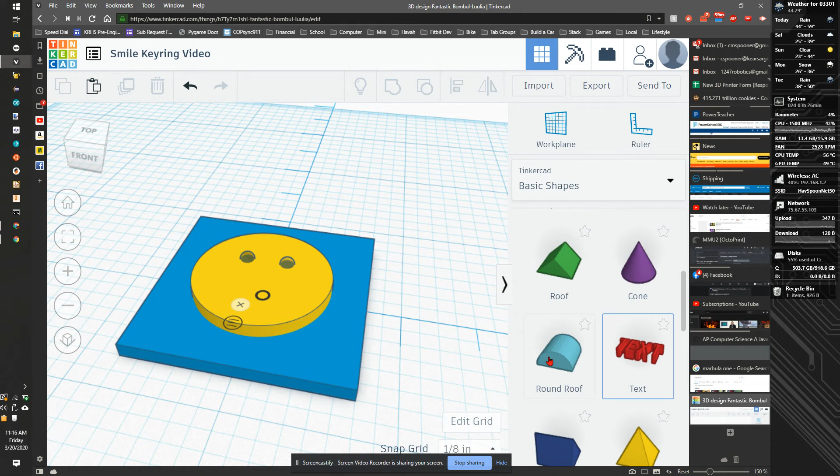So I'm gonna take and drag this piece out. Now, I like to move things out away from my shape before I start, because that lets me sort of fix them. Now, if you notice, the orientation of this piece is wrong. So the first thing we need to do is we need to take and rotate him 90 degrees upwards.

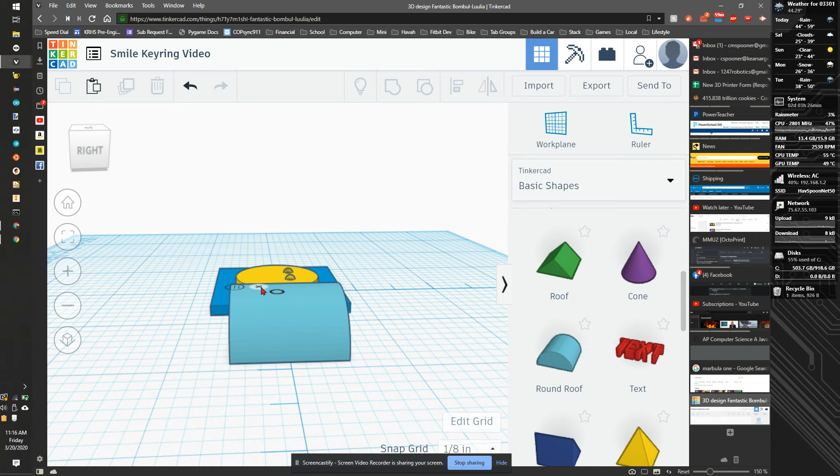So if you click on the shape, and I'm going to go to isometric view, you can see we have this angle here. This lets me rotate this on this axis. This lets me rotate this axis. And then this guy, who's hard to see, lets me rotate it on the axis we actually care about. So I'm going to click on this guy here.

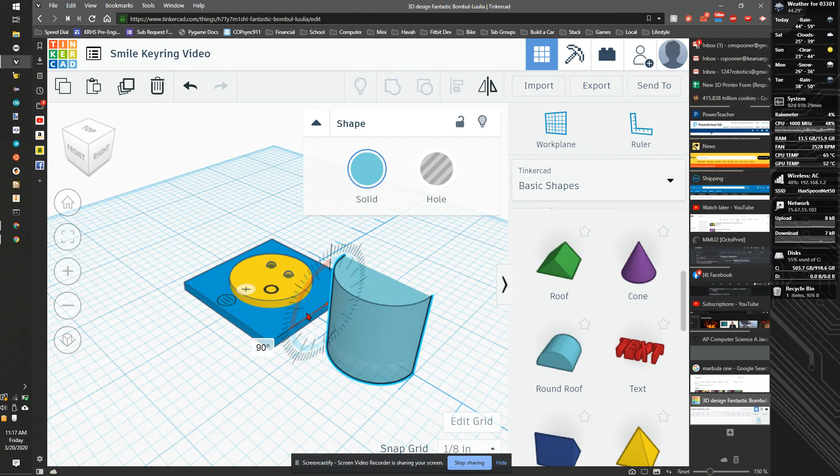And now if I move outwards, I can move it more finely. If I move it middle, it's going to move on the 5s. And if I move on the very inner, I can only move it at very specific things, like only 22.5 degrees each time, sort of like a clock. So I'm going to go to 90, and that should set me to be the right

location, right, or angle. Now, I need to scale this guy down, because if you make him the full size of the smile, he'll take up the whole bottom of the thing. I'm going to make this 0.75. That's going to change to 3/4, but that's fine.

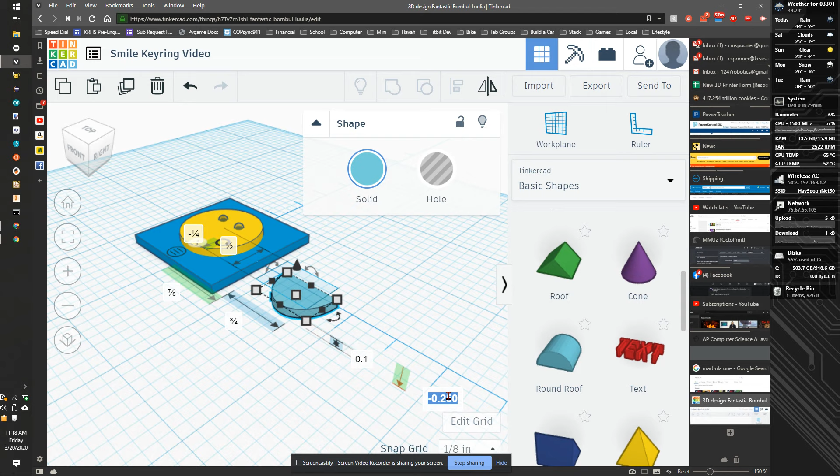I'm going to set this height to be 0.1, and then I want this thing to be up off the bed a little more than 0.1. So I'm going to go 0.125. I need this to stick out slightly from the face, otherwise it meshes weird, and I don't trust it's actually going to cut it out. If I want to cut this deeper, I can always make this taller to compensate.

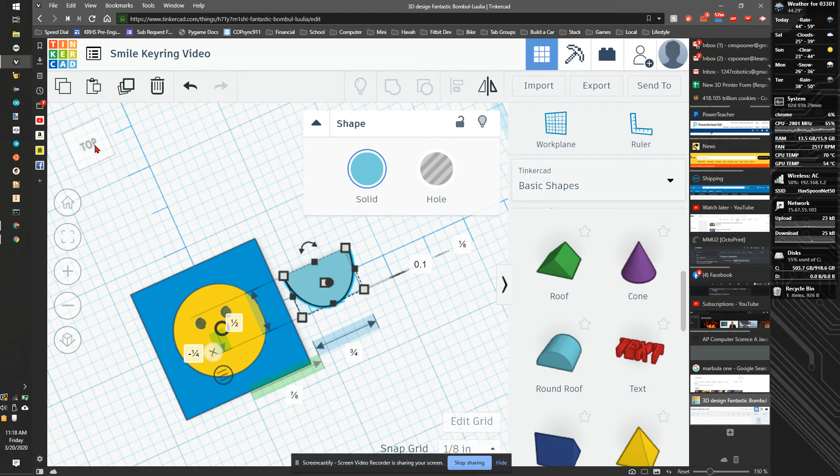Now, I'm going to look at the top, and I'm going to rotate the top so it's more like the way I want it to be, which is always dizzying. And I'm going to click the top again. There we go. I also need to change this height because it's a little tall. So I'm going to change this from a 3/4 inch to 0.25. 0.25. Maybe I should make this smaller. 0.5.

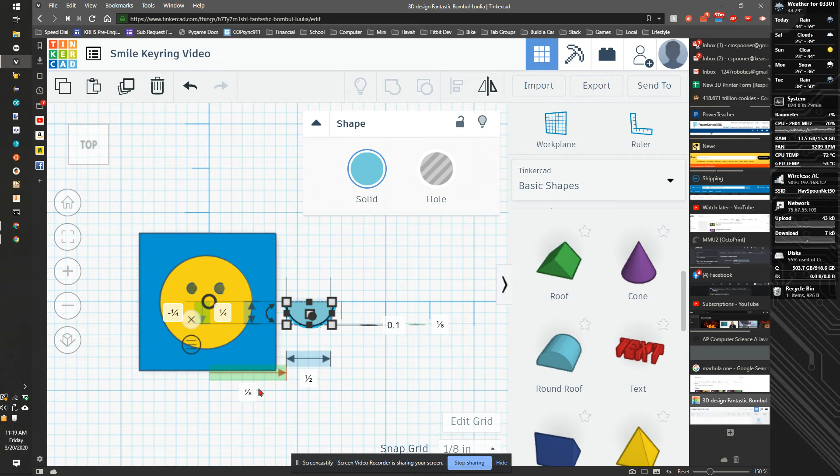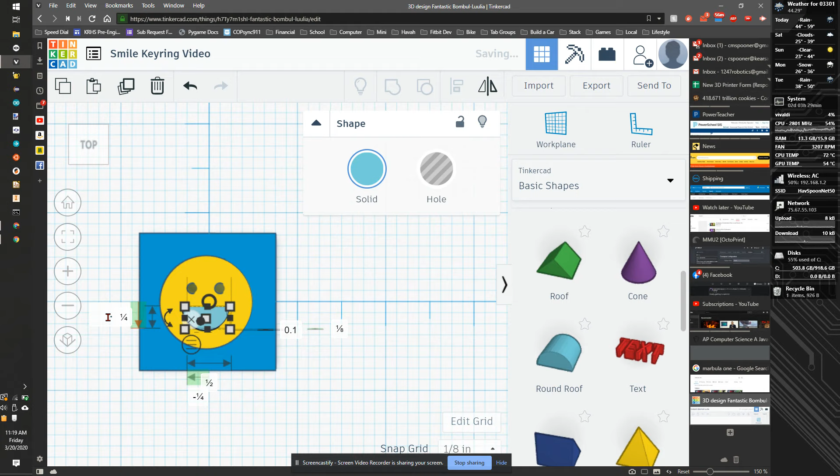I'm going to locate him. So I'm going to take this width and change this number to be negative half the width. So that's going to be negative 0.25. And I want to bring him down some. I want the whole thing to be down a bit. So I'm going to go negative 0.3, or 0.25, 0.3, negative 0.325.

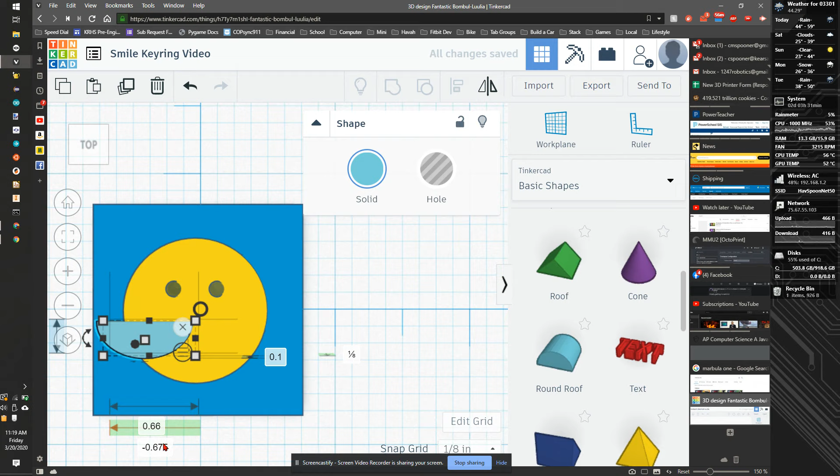This might look a little weird. I'm going to change the width to be a little bigger. So I'm going to 0.675. But then this has to be negative 0.675/2. Oh, it doesn't let you do math that way. So I'm going to do 0.66. Make this negative 0.33.

That looks generally okay. Maybe it should be a little taller and a little farther down. So I'm going to middle click with the mouse, or I can click the zoom, and that will, whoop. So I'm going to make this a little taller. So I'm going to make it 0.325, and then lower it down negative 0.5. Nope, too much. Negative 0.4. Guess and check is our friend here.

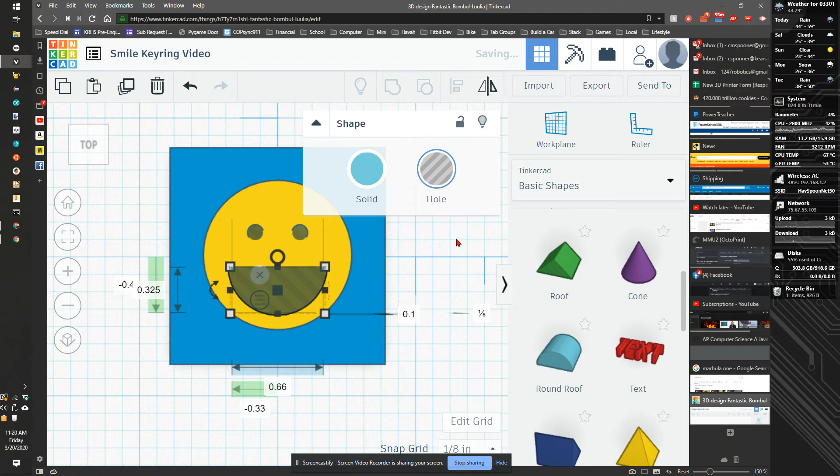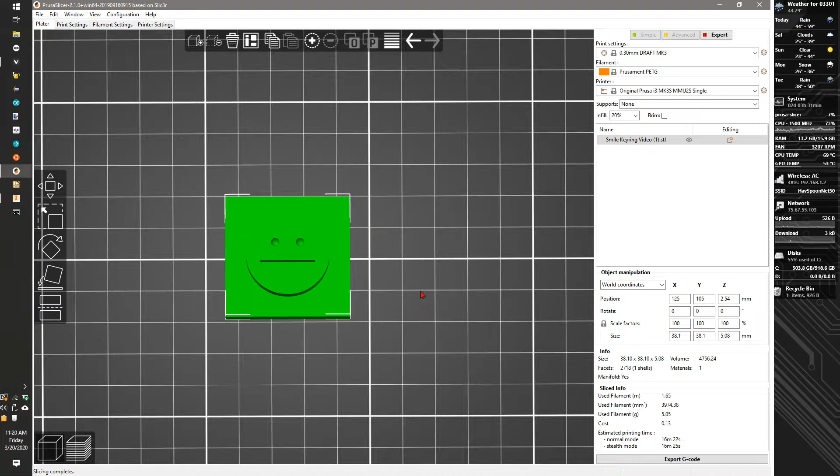Now, this last thing is I want to make this a hole, so it removes the chunk of the mouth. Now, if I export this as an STL file, I can add him back to Prusa Slicer, and we should see that the mouth is now removed. He looks very happy. So that's the smile portion.